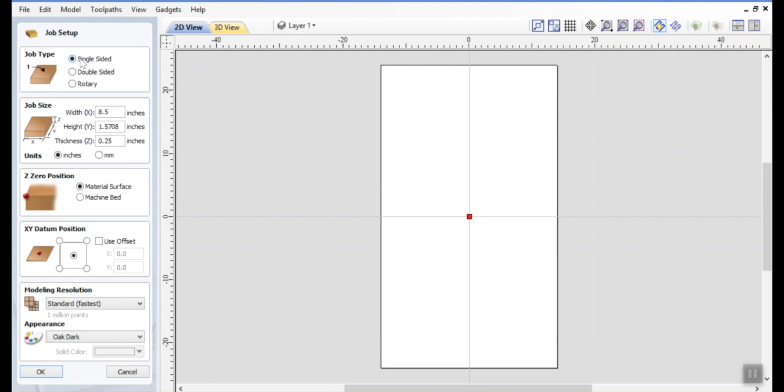If you haven't done a rotary file before, if you're like me, normally doing a single-sided versus a double-sided, it comes up this way. So we're going to come down from single-sided and click this one, rotary. And if you notice, this instantly changes from a flat board to a rod. The length of my rod is 8.5 inches long. And the diameter of that rod is 0.5, because I'm making pegs and joker pegs to go in the holes.

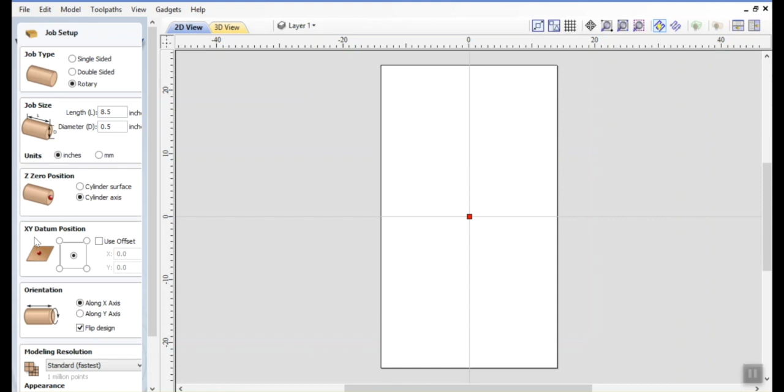The 0 is going to be the center of the axis. The datum point is going to be the left corner. If you're watching the screen to your right, you will see it jump down to this corner down here. And we're going to be along the x-axis. What I did, as you saw in part 1, is I laid my axis. If this is the bed of my machine, this is my x, and the y goes this way.

So on the front of my table, I mounted my rotary axis, and I did that on purpose because it only really takes about 3 or 4 inches off my bed area that I can work in. I've got a 50-inch table, so I'll leave this set up, and then I don't have to put it on and take it off all the time. And that lets me work on objects up to 48 inches in this area. So that's why I did it that way.

Also, what I'm working on is very short. I originally tried to make it 17 inches wide, which is all this, and what happened is it kept breaking. And it kept breaking because I'm machining it down to a 0.25 inch diameter rod, and it flexes too much, so it breaks. Alright, so there it is.

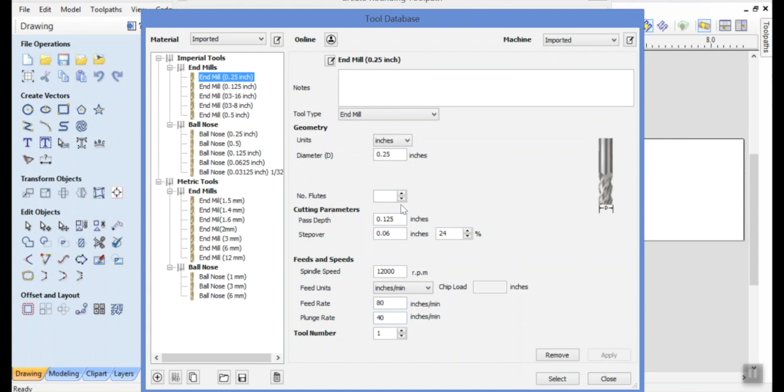Now the next step, after you've selected one of these 3, is to select the toolpath. The toolpath that I started with was an 1/8-inch end mill. That's one of the ones that took so long, but we're going to do 1/4 inch. We're not going to mess with any of this here. We're going to do that later in the program. So we select that.

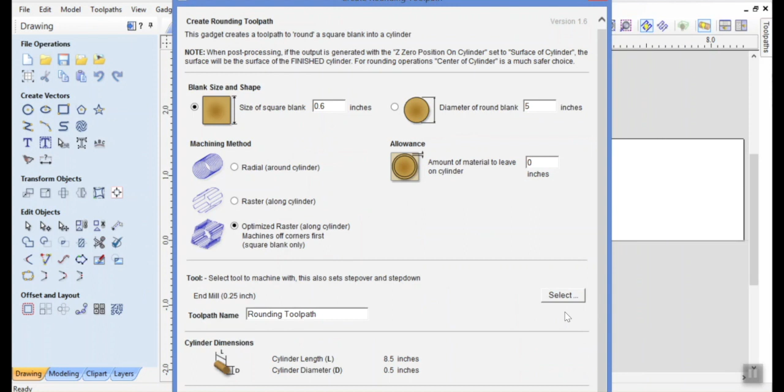Then I come down, and it's hiding down here under the OK. So I've learned to press here on this surface. So I deselect that. Instead of selecting that, I close it. It's still selected if you notice the box. But when I select here, that turns off. That allows me to push my enter key and makes it create a toolpath for us.

And there's our toolpath. So I'm going to click on that toolpath and edit some things. I'm going to leave the speed at 80, but I'm going to change my plunge rate down to 25. Plunge rate is how fast this comes into the piece of wood. And 40 is too fast. It actually bends or flexes the wood before it engages. It pushes down on it, and then the wood snaps back into that bit, and sometimes it breaks it. That's the problem I was having before.

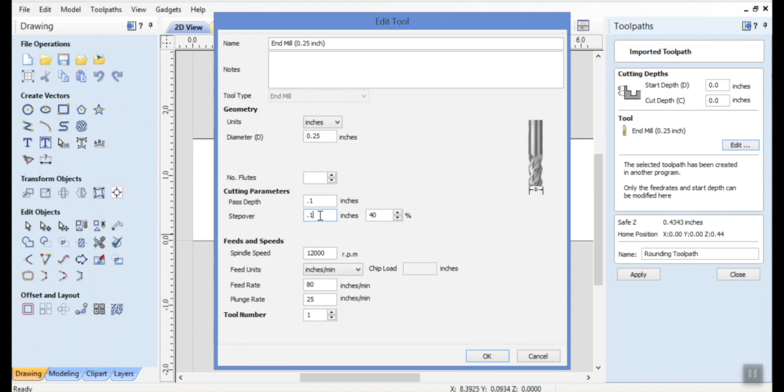My pass depth, I'm going to change to 0.1 to lower that down a little bit, and I am going to make my step over 0.1 to increase, or decrease the number of passes it takes, which increases my cut and my chip load. But that's okay. So I'm going to select OK, and then I come over here and hit apply. And believe it or not, we're done.

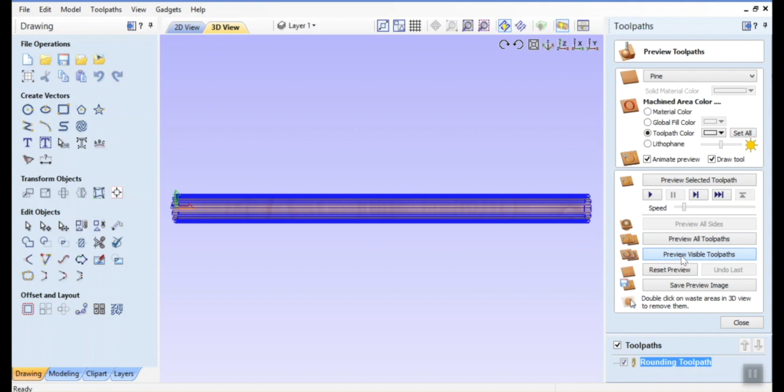We have to save it, of course, but let's preview it so you can see what it looks like. We're going to hit preview. Now I'm going to slow it down first so we can look at it, and hit preview visible toolpath. Remember this is my Y path, but my Y doesn't move. My Y axis is now my rotary axis. So this turns 1/10 of an inch each time that this goes from one end to the other.

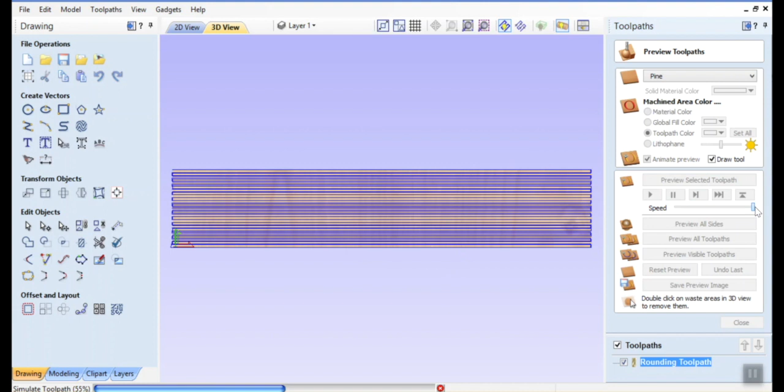Every time it goes, it stops. The Y-axis rotates 1/10 of an inch, then it goes back. And this is going back at 80 inches per minute. It'd be nice if it was per second, but it's not. And then it comes across, back. And this takes about 10 minutes to do. I'll speed it up now so you can see the finished product. If I boost that up, you can see there it is.

And that's what I want you to do. That's the first project for you: make a rod. And the next step, of course, for CNC Shark users is to click this box, hit save, and you locate this toolpath. I'm going to stay below it so I can highlight the one above. This is the one we're going to use, but it's easier to read if I stay below it.

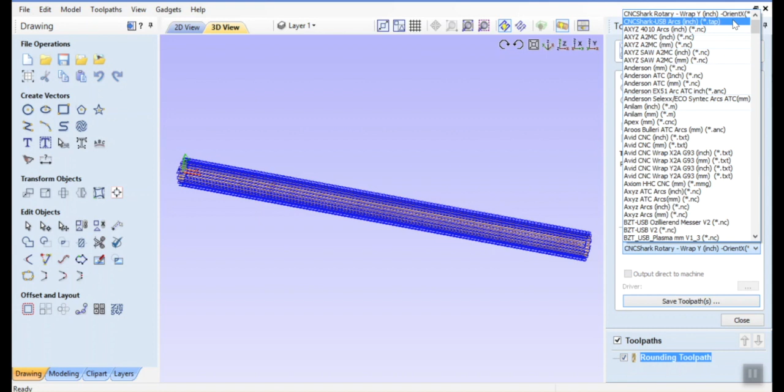CNC Shark rotary, wrap the Y in inches, and orient on the X-axis. So that's what we want. We're wrapping the Y and traveling across the X-axis, and the Z is coming up and down. So that's the one we want. We selected it, and then we tell it to save. And we save it to our removable disk. And we're going to call it Rounding Toolpath Raster. And that's going to work good.

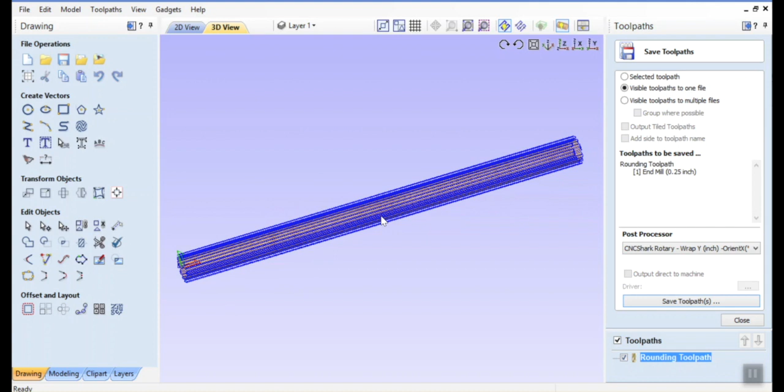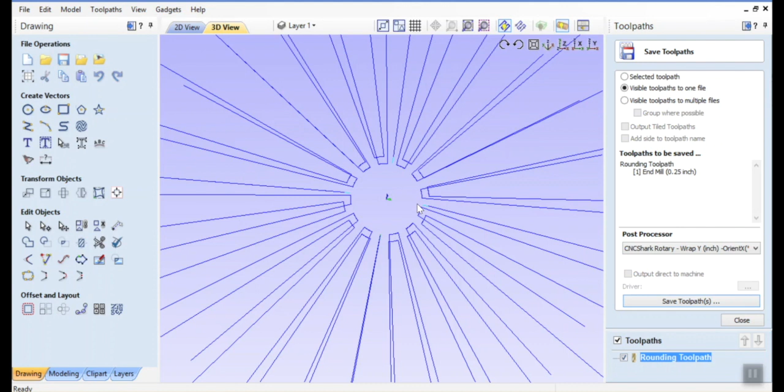Save it. And go out on a machine and look at video 1 so you know how to hook it up. Put that rod in there, 0.6 in diameter, and it will machine a rod that looks like it's not quite round, which is okay. As you see, as it comes through and machines each time, there's a flat spot. See them right there? Those flat spots are going to be shown on the rod, and that's okay for my application, because what I'm making doesn't require a perfectly rounded rod.

If you require a perfectly rounded rod, do the one that we talked about first. This one. This will give you a perfectly round rod, but it takes forever to get there. So my suggestion to you, spend 79 cents and buy one, because it's quicker if all you're trying to do is make a round rod. Just go buy yourself a round rod. But what I'm doing is making a round rod, or a roundish rod, so that I can then make some pegs, and I'll show you that at the end of the video.

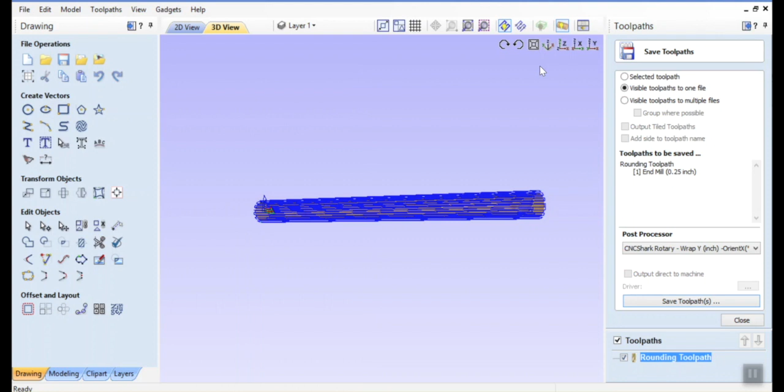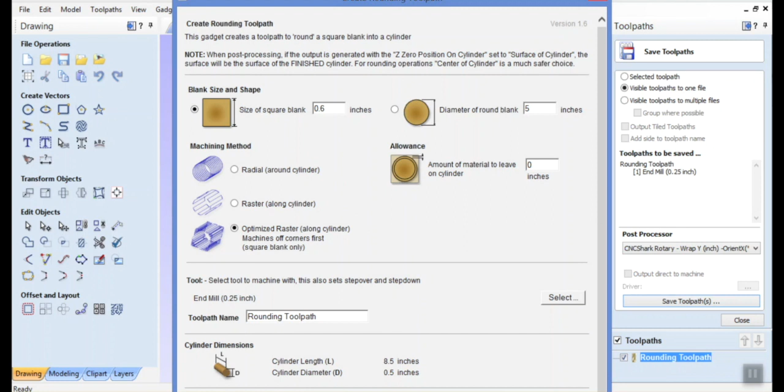So we'll close that. That's our finished product. We're done. We'll do a file save, attempt 1, and then make another file, or I'm not going to do it because that's your homework. Make another file using this technique, and then make another file using this technique, and decide which one you like best. Have fun with your CNC, do your homework, and then come back to part 3.